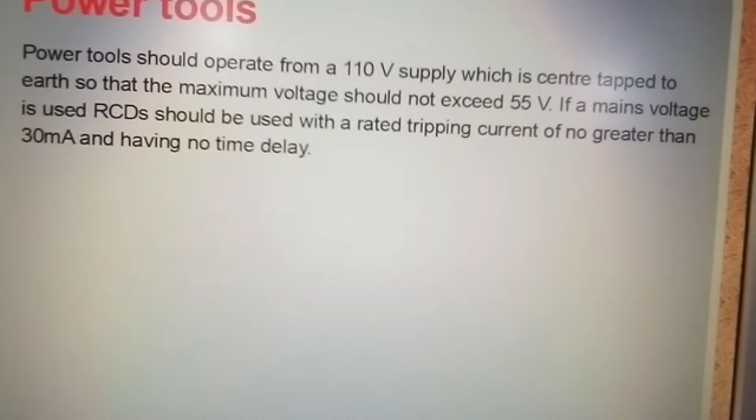And here's your tools that you're all familiar with and should know by now how to handle, use, and apply for safety purposes.

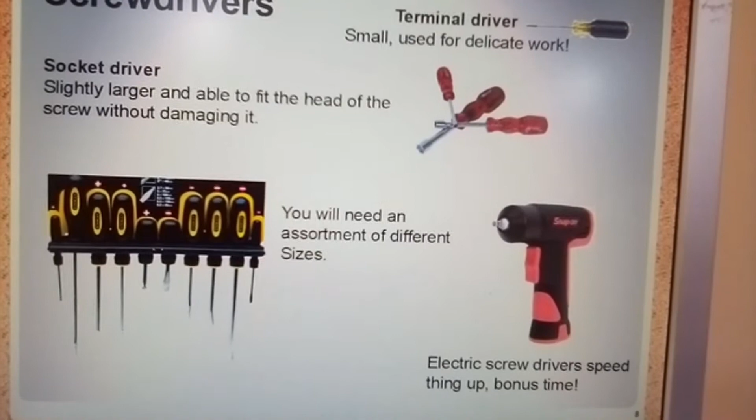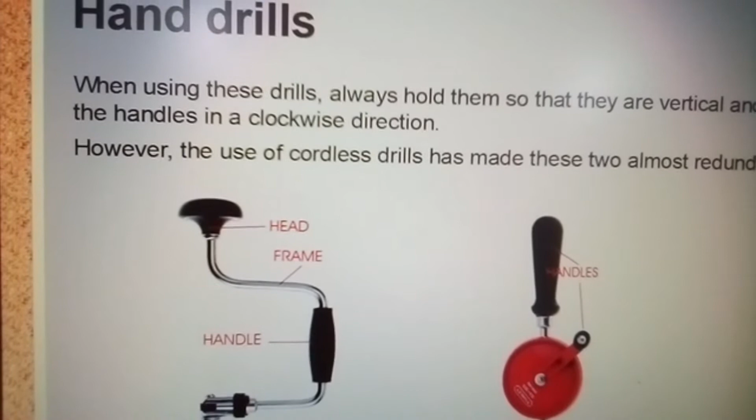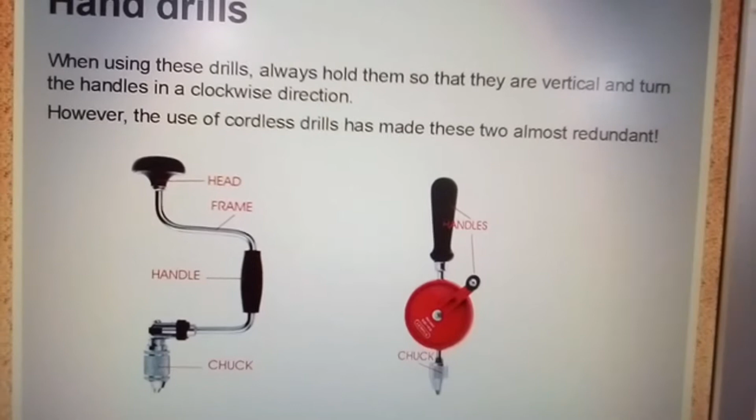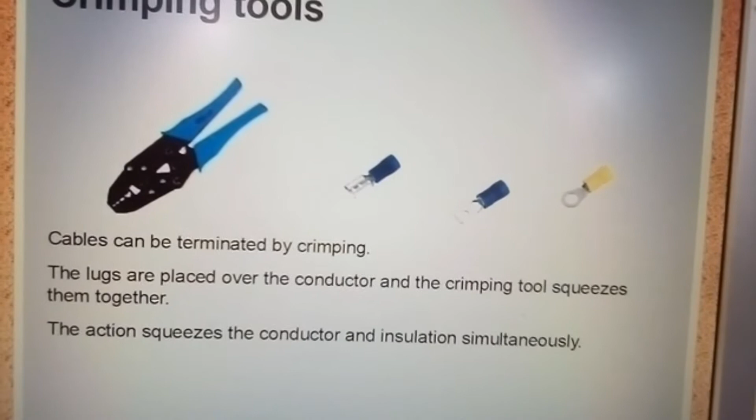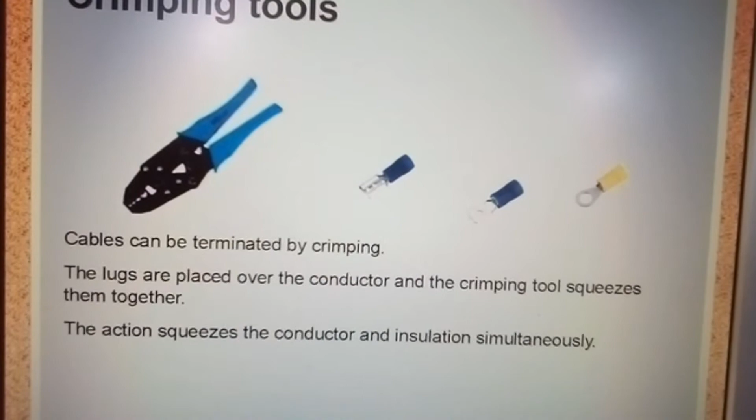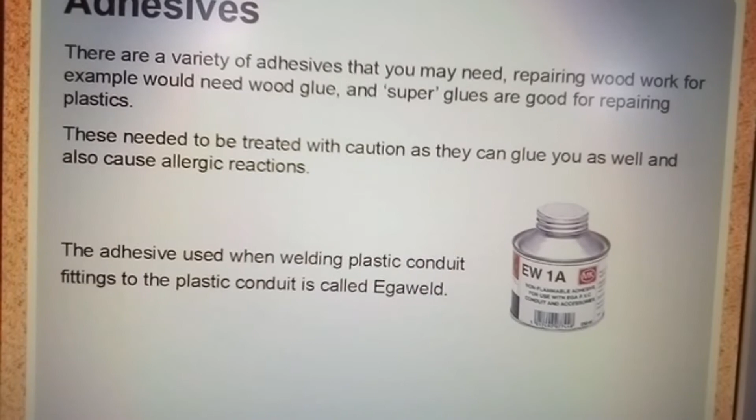And adhesive. This used to be Evo-Stik glue at one time, but Evo-Stik glue was so nice that youngsters began to use it inadvertently for the wrong purpose, so they had to change it. You cannot buy Evo-Stik glue now. Very nice glue indeed.

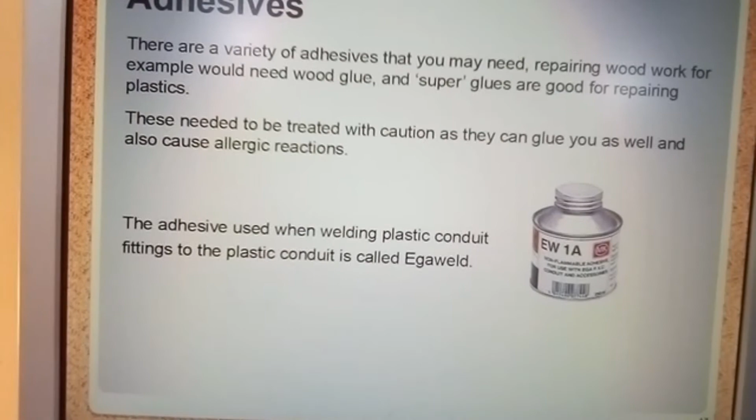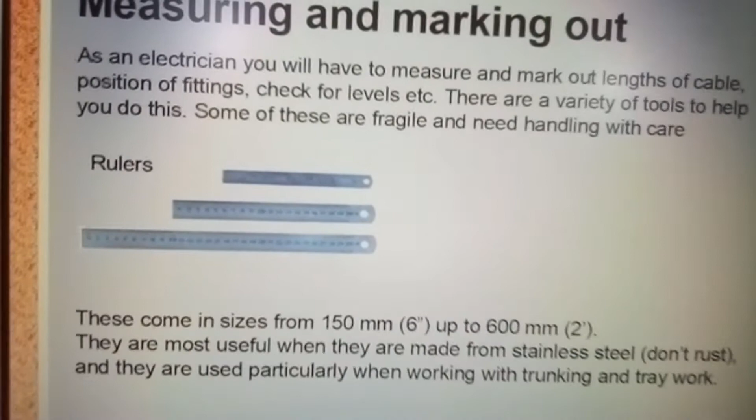Rulers. Again, this is for you to read yourselves, I don't need to read it out to you.

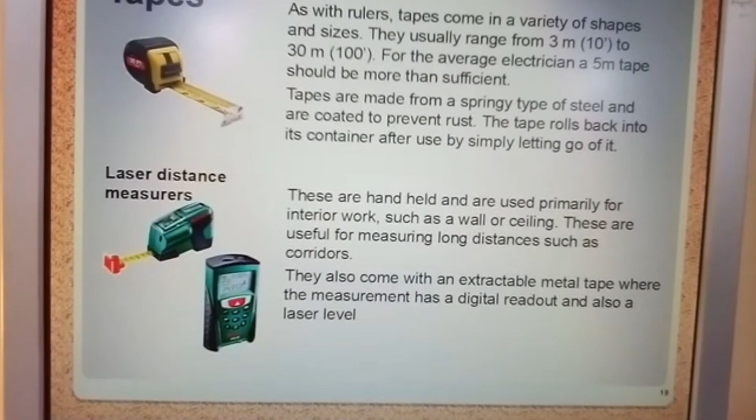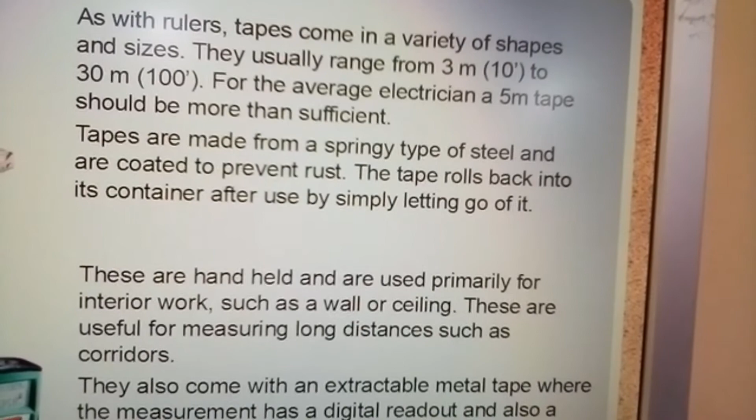Measuring implements, tape measures, spirit levels, various kinds.

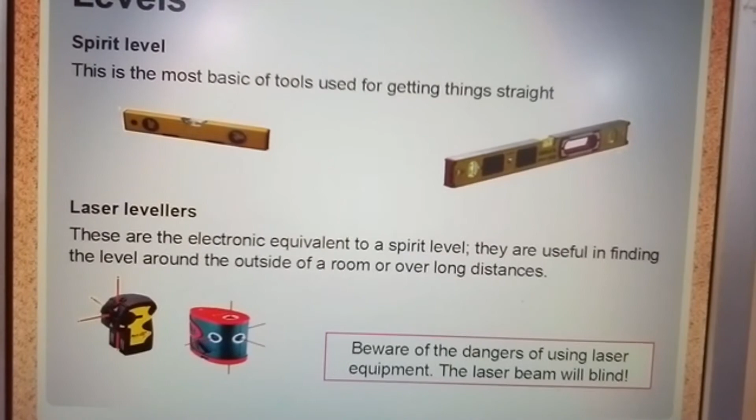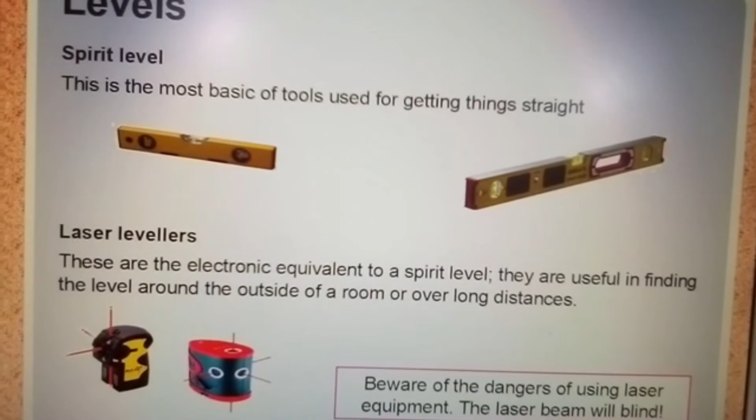And again, it's telling you about the dangers here. Plumb lines - oh, I call them - we call them plumb bobs.